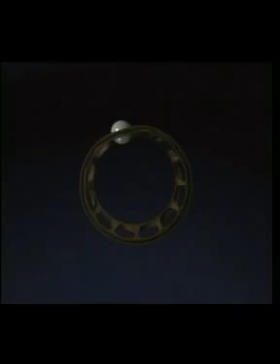This SKF training film is about single-row angular contact ball bearings. An angular contact ball bearing consists of a retaining cage and a row of balls with an inner and outer ring. The raceways are ground at a 40-degree contact angle, which means they can carry large axial loads.

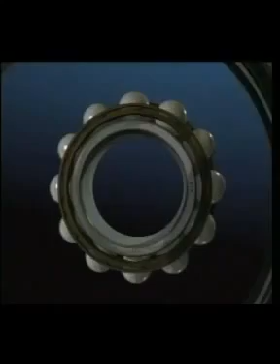Other bearings in this family are the double-row angular contact bearing, which is always arranged in a back-to-back configuration, and the four-point bearing, which can only be used for axial loads.

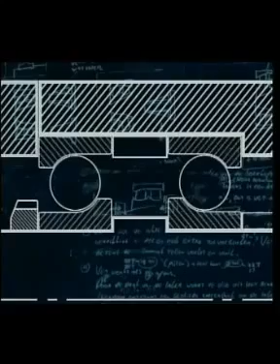Single-row angular contact ball bearings can accommodate axial loads acting in one direction, and therefore they must always be used in pairs, in face-to-face or back-to-back configuration. The resulting setup will accommodate radial and axial loads in either direction.

In cases where the axial load in one direction is high, they can also be used in a tandem arrangement. Tandem arrangements still require an opposing matching bearing to locate and support the shaft.

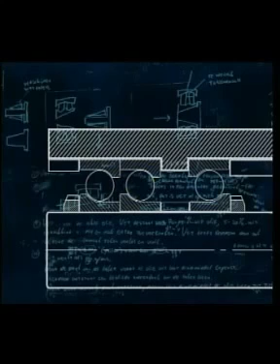When mounted in these configurations, the clearance in the bearing is predetermined during manufacture and is indicated by the suffixes on the bearing designation. Various degrees of clearance or preload are available to suit different application requirements. The wrong configuration could cause severe damage to the equipment.

Angular contact ball bearings are commonly used in applications like gearboxes, pumps and machine tool applications, where high accuracy, speed and axial loads are present.

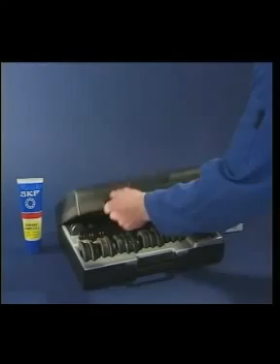This film shows the mounting for a back-to-back arrangement. The most common way of mounting small angular contact ball bearings is in a cold condition using the SKF fitting toolkit. Always keep the bearing in its protective package until the actual mounting starts and use some light oil on the shaft.

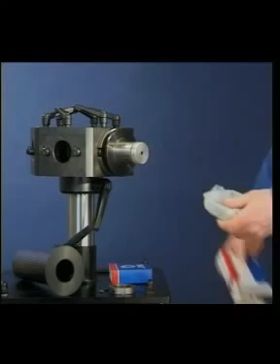The fitting tool kit is designed to drive the inner and outer ring at the same time onto the shaft. This avoids potential fitting damage to the bearing by ensuring the shock loads are not passing through the loose ring.

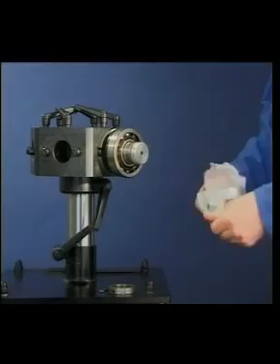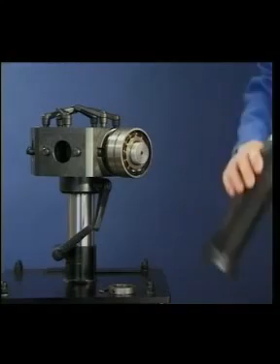When both bearings have been mounted in the correct configuration, they're secured on the shaft by the lock nut.

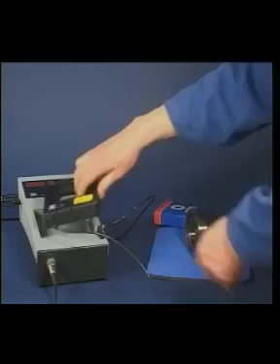Another common method to mount angular contact ball bearings is with heat. SKF supplies a wide range of bearing induction heaters for this purpose. In this instance, the small Scorpio induction heater is used.

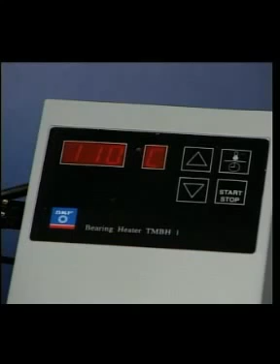Do not heat the bearing above 110 degrees centigrade and always use protective gloves.

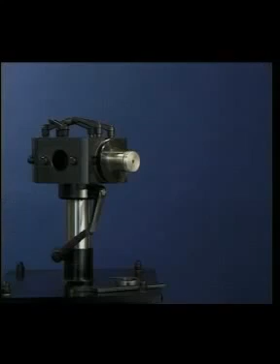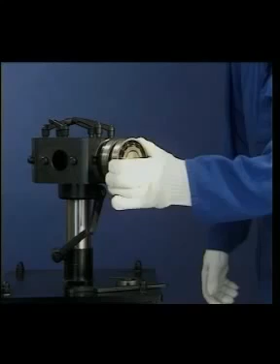After the bearings are mounted, secure them on the shaft with the lock nut. Take care that the bearings have cooled down before fitting into the housing.

To dismount angular contact ball bearings, first remove the lock nut. The most common method to remove the bearings from the shaft is to use a mechanical puller.

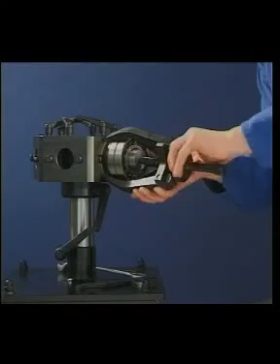This application has been designed with a backing ring, ensuring that the puller force is transferred through the ring with the interference fit.

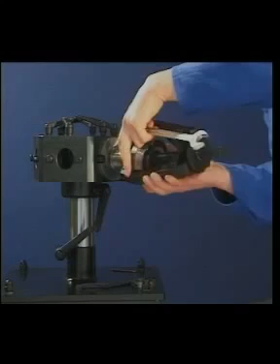When cold mounting angular contact ball bearings, always ensure the inner and outer rings are simultaneously driven onto the shaft. To put the force on the non-locating ring would result in the shock load being transmitted through the rolling elements and cause damage to the bearing.

SKF manufactures a complete range of pre-adjusted bearings which, when used as pairs, will ensure the correct amount of clearance or preload is achieved. It's very important to check the application manual for the correct setup information.